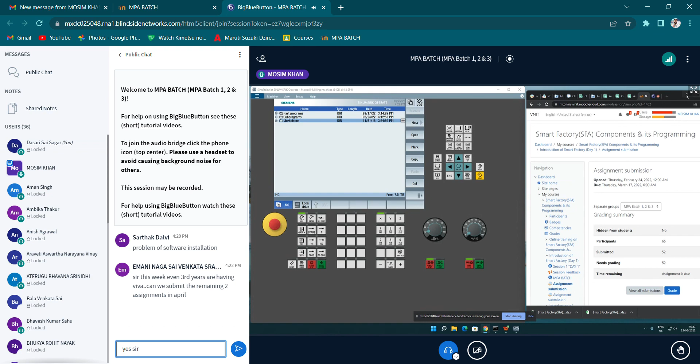So we will be starting cycles. In cycles also, the start of program and end of program will be the same. Okay. Just give one name, CNC. Just practice directly on the software, everyone. CNC05. Just create it there. Blank size, block center, width is 100, length is 100, and thickness will be -50. Absolute mode. Accept it. Write the startup program.

G71, G94, G75 Z0, G75 X0 Y0, M06. Now our first cycle will be the facing cycle. In milling, I will be telling you the important cycles. Okay. Now the first cycle is face milling. What is face milling?

If you have a raw material and you have to remove the maximum material from the top surface. So for facing, we can remove maximum material with the maximum depth of cut. So we will be selecting a face mill tool. Just go to select tool, create face tool, and give D1. M06 D1. Then start the spindle M03 at 1500, start the coolant M08, and give the position G0 G90 G54 X0 Y0

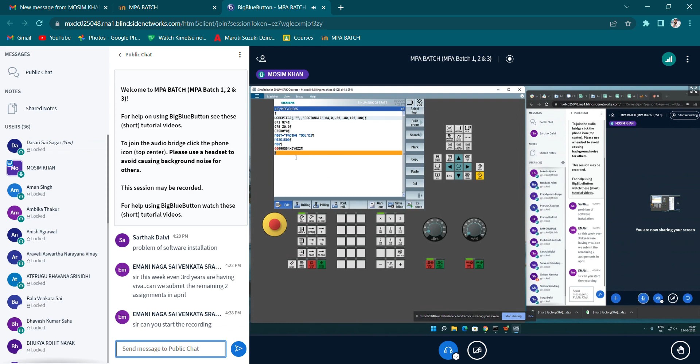Z2. I think you all clearly know this startup program and end program. It is familiar to you all now. So from here, just go to milling, just go to face milling. Now here you have to fill up all this data. Everything will be there. Just use your keypad, not your mouse. Okay.

If you go with the down key, you will see RP. First, you will see PL, meaning machining plane. Like I told you while explaining G code and M code, in a 3-axis machine we select the G17 code, XY plane. Now the second option is RP. RP means retraction plane: after machining, how much your tool will go up. We have to put that value there. Just give 5 or 10 mm. Now here is SC.

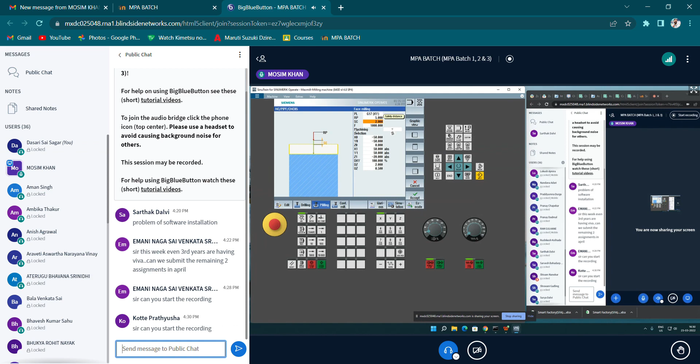SC means safety distance. Before machining, how much your tool will be up? Sir? Yeah? Sir, can you start the recording? Yeah.

So I will explain further. PL is the plane, the XY machining plane. And RP is the retraction plane: after machining, how much your tool will come up. We have to mention that point in RP. After this, there is SC, meaning safety distance. Safety distance means before machining, how many mm your tool should be above the raw material. So we have put the safety distance 2 mm from our raw material.

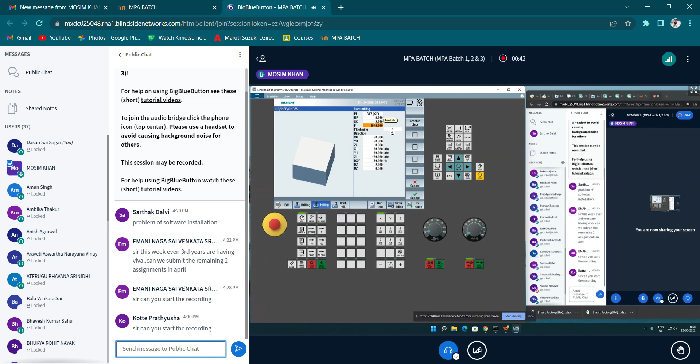Now F means the feed rate for X, Y, and Z. For all 3 axes, we have to mention the feed rate in the cycle only, not in the direct program. Now in machining, there will be roughing and finishing. On clicking machining, there will be the roughing option, and the second one is the finishing option. So first we will select the roughing cycle.

Then you will see direction. There will be different directions; you can see them in the diagram also. You can select any direction, how your tool will be moving. There are different types of directions. So just select the first option. Now here is X0, Y0, Z0, X1, Y1, Z1.

First of all, you know that the work offset is the center of your block. You have to start the machining from the corner of this part. Now your X0 Y0 is at the center of the block. You have to shift minus 50 mm. Our block size is 100 by 100. So in X0 and Y0, I have shifted minus 50 mm.

That means your tool will be here in this corner. X0 minus 50, Y0 minus 50 means your tool will be on the left side corner. Now Z0 will be 0 only, because we have to cut the material now. And X1 means how much you have to move the tool in the X direction.

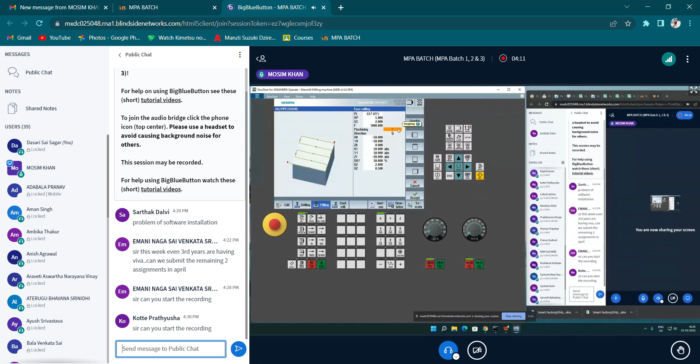UZ means finishing allowance. Here we have selected the roughing cycle first. In UZ, for the finishing operation, we have kept 0.5 material. Means we have to cut 20 mm material, but there will be extra stock of 0.5 material. So go on and select accept. Sorry. After this coordinate you have to mention the cycle.

Go on accept. After this you have to write the end of program: G00 Z10, G75 Z0, G75 X0 Y0, M05 M09 M30. Just renumber this program and start the simulation. Sorry. Okay, now start the simulation.

In simulation, you can see some error is there in N20 block: syntax cannot be implemented. N20. Okay, here is G74. It is G94. Now you can see program control override in slow motion. Here you can see only 0.5 material will be remaining.

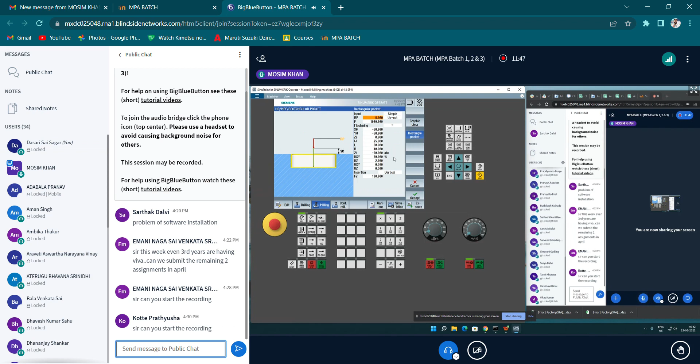And while doing a pocket or slot, use upcut. Here is the option upcut and downcut. Use the upcut. While using a downcut, there will be very high force on the raw material, so your tool will be blunt or worn. So every time use upcut. Now the parameter is feed rate 1000.

And here is the machining style: roughing and finishing. So like in facing also, there will be the same option while selecting this finishing operation. Same parameters you have to fill up, and in the last option there will be no usage.

Now you have to do a rectangular pocket. Now this is your raw material. Now the center is your work offset. We will not do it in the center. We can shift to the left side, right side, top side, anywhere. Like I have shifted minus 50 mm from this work offset, means in X minus 10 and in Y minus 10. Till here our pocket will be there. And Z0 will be 0.

Now we have to mention here the length and width of the rectangular pocket. Here you can see in the diagram. The width is 25 mm and length is 50 mm. If you want a corner radius, then you can give the corner radius. If you don't want any corner radius, directly give 0. Now here is Z1, means depth of cut. The depth we want of the rectangular pocket is minus 10 mm.

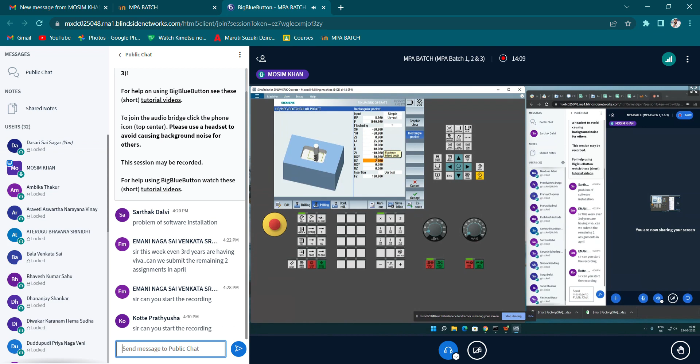DXY is how much your cutter is engaged to the raw material. DZ means how much depth of cut you want. Total depth of cut is minus 10 mm. Now how much cut per pass you want, means a single cut of 2 mm will be there. And the finishing allowance for XY and Z is there.

In the facing cycle only one was there, but in this rectangular pocket XY is also there and Z is also there, because in the facing cycle only the depth of the raw material is maintained, but in a pocket all three axes are moving in X, Y and Z direction. So we have put a finishing allowance of 0.5 in XY and in Z also.

Now in this there are pre-drilled, vertical, helical and oscillate. Every time select the vertical option while doing a rectangular pocket, circular pocket and slot. And we have to select a parameter for this insertion, how much feed rate we want. Just give a very slow feed rate there, 150, because we have to enter the raw material at very slow speed. Just go on accept, write the end of program G00 Z10, G75 Z0, G75 X0 Y0, M05, M09, M30.

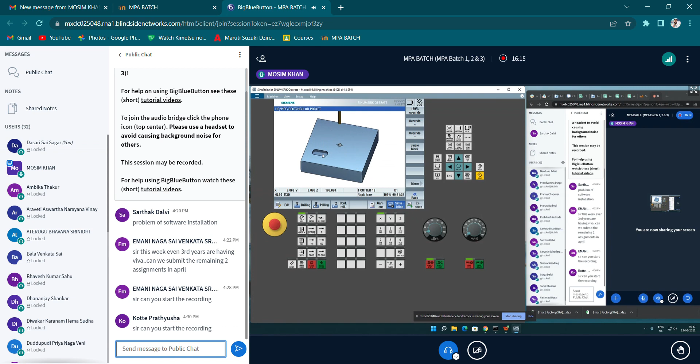Just go on edit, renumber this program, and start the simulation. I have told you we have shifted the work offset. We have not done it at the center directly on X0, Y0. When I give you an assignment, I will not give it only at the center. I will be shifting it in any other direction, anywhere. So I have given this example of how to shift the pockets directly in the cycle. Here you can see X0, Y0 if you have to shift anywhere as per the diagram.

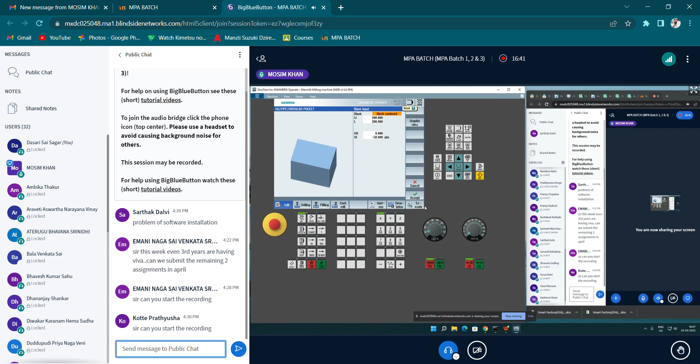Now we will see the circular pocket. In the circular pocket, same we have selected the raw material 200 by 200, minus 50 mm thickness. Same we have written the startup program G71, G94, G75 Z0, G75 X0 Y0, and we have selected the end mill of diameter 10, M03 S1500, coolant on M08, and give the position.

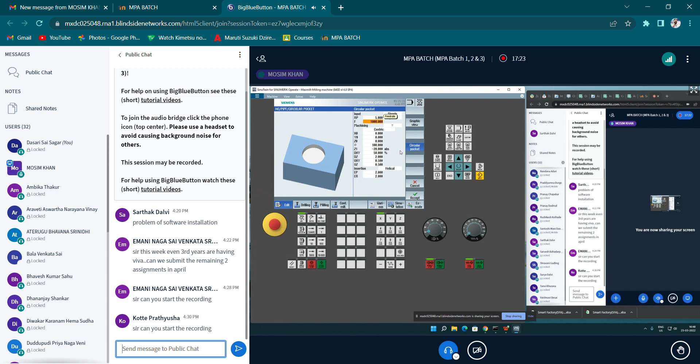In this, we have to select the option. Going to the milling option, you have to go to pocket and select circular pocket. In circular pocket, you will see the same retract plane will be there. Feed rate will be there. Here the machining option is there, roughing, finishing.

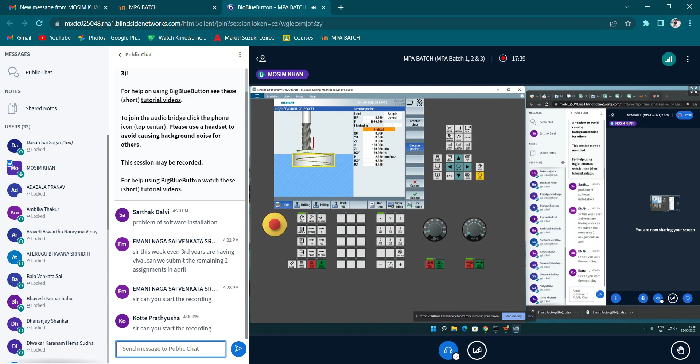The centric option is there. Here are the different options you can see: helical - you can see on the diagram how your tool is moving while selecting the helical option, while selecting the centric option, okay.

Now, same as last time, I have shifted in rectangular pocket. Now I will show in the center of your work offset. In X0, Y0 is the center of your block, work offset is there. Same we will form a circular pocket in center, X0, Y0, Z0.

Now how much diameter of pocket you want in your block, that diameter you have to mention here, like 80. Now how much depth of cut you want? Minus 20. Now how much infeed depth, means number of depth, you have to mention here, 2 mm, and the finishing allowance 0.5 for X, Y, and Z.

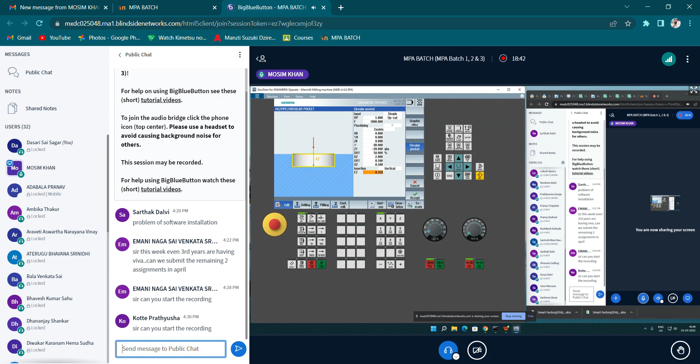Meanwhile, I have selected here vertical, go on parameter 100, FZ, and go on accept, and write the end of program: G00, Z10, G75, Z0, G75, X0, Y0, M05 spindle stop, M09, coolant stop, M30 end of program, rewind, start to rewind.

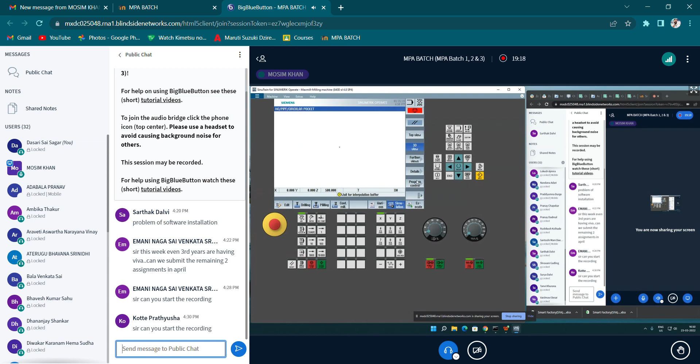Go on start and start the simulation. You will be seeing at the center of your block, your circular pocket will be there. You can see at the center of your work offset, we have created the circular pocket.

Meanwhile, if I have shifted in this direction, means X50, Y50, anywhere I have to shift in any direction, so directly in the cycle, you have to give the parameters.

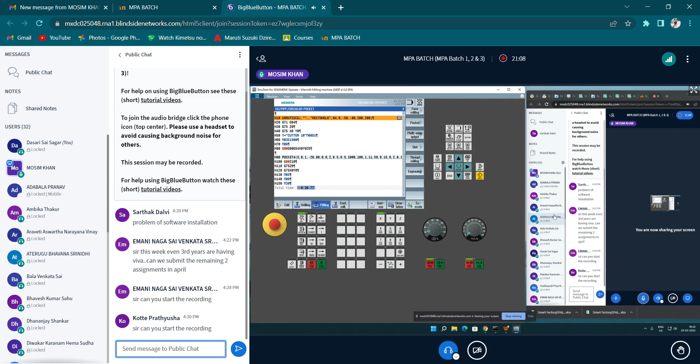Students, if any query is there, please ask. How can I take this further if you are not answering my questions? I have to take everyone's names, then I have to ask by name. Pranav, Ambika, Araveti, please reply in public chat if you are not facing any issue. Bala, Bhavesh, Dasari, Dhananjay, Diwakar, Priya, Emani, Himanshu, okay.

Now we see the spigot. If you want, this type of spigot is there. You can see this is a rectangular spigot. Same, circular spigot is there, and this is the multi-edge spigot.

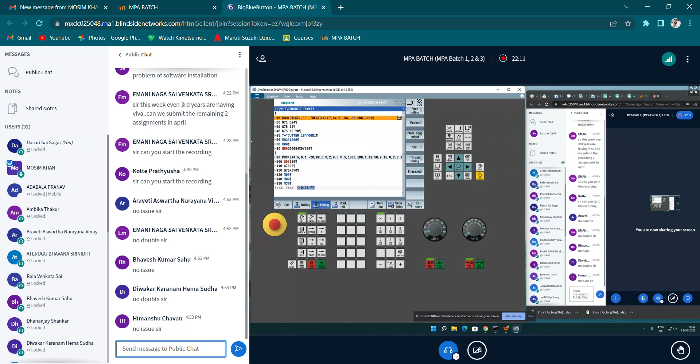Just create a block here for the spigot now, like rectangular spigot we have to do now. Just create a block of 100 by 100 and thickness is minus 50. One of you don't know how to create the various also, I have seen, so I am telling this again and again. There is normal width and length of the block, okay, and you have to only mention here HI, means thickness of the raw material, that HA will be 0.

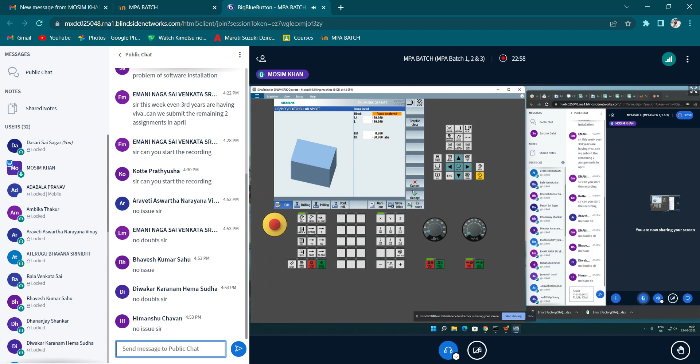Just go on accept, and in various, just see this, it should be ABS mode, absolute mode. Okay, just write the startup program G71, G94, G75, Z0, G75, X0, Y0. Select the tool. Start the tool M03 S1500. Start the coolant M08 and give the position G0, G90, G54, X0, Y0, Z5.

Now go on milling, go on multiple edge spigot. Select rectangular spigot here first, okay, and go on accept.

Same parameters you can see here also, there are somewhat differences are there. PL plane you have to select G17. Retract plane is there, 5 mm you have to select. Safety distance is there, 2 mm.

Now here two feed rates are there you can see: one is for the XY movement of feed rate and one for the Z while going to the depth. That you have to select feed rate very low, okay, you can select 50 or 100 feed rate for Z.

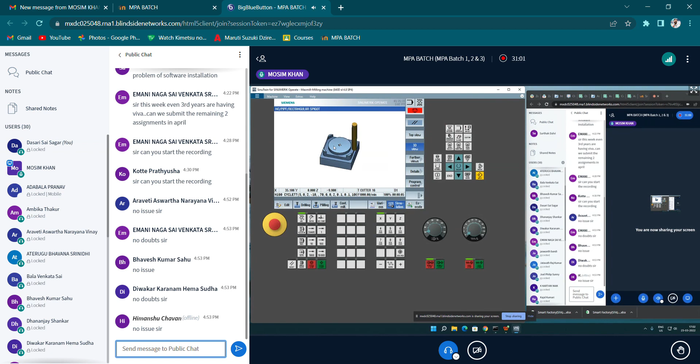You can see here there will be the rectangular spigot also and circular spigot also. I will be running the simulation. First it is the rectangular spigot. Now this is the circular spigot.

Now in milling there is a slot option. I will be selecting slot, if you want this type of slot in your raw material.

Now you have seen the rectangular pocket, rectangular spigot, circular spigot. Now if you want any type of slots, there are different types of slots, like longitudinal slot, circumference, open slot, elongated slot. There will be the same parameters used. Now we'll see any one of these.

You can see same parameters are there. PL, you have to select a plane. Mill direction, I have told you, you have to select up mill. Retract plane is there, safety distance is there, feed rate is there. Here is the reference point from where you have to start the machining. You can start with any end.

You can see from the left side, middle of your work offset. I'm just telling you, start from the middle of your work offset only while doing this slot rectangular pocket, okay, it will be easy for you for the machining.

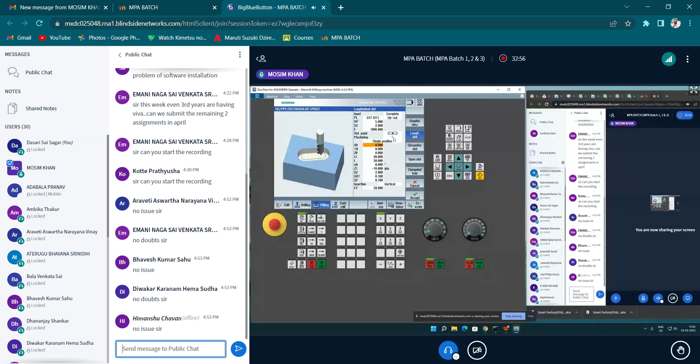X0, Y0, Z0. Now here you have to mention the width of the slot, like 20, and length is 50. Any angle you want for this slot, you can mention here. Depth of cut minus 10 mm, how much depth you want, and here is the number of depth of cuts, 2 mm. The finishing allowance is there for X, Y, and Z, and for insertion in the vertical direction give the feed rate very low. Okay, just go on accept.

Now we will see three things in one cycle only, in one program. Just see the simulation - you will be having the recording also, so you can see this program and how in one program only you have multiple cycles. While completing each cycle, you have to go on end of program. Don't do M30 here - go on M09, then go directly to new tool. You have to give a new tool, start the tool, give the coordinate, and then select another cycle. You can see three cycles in one program.

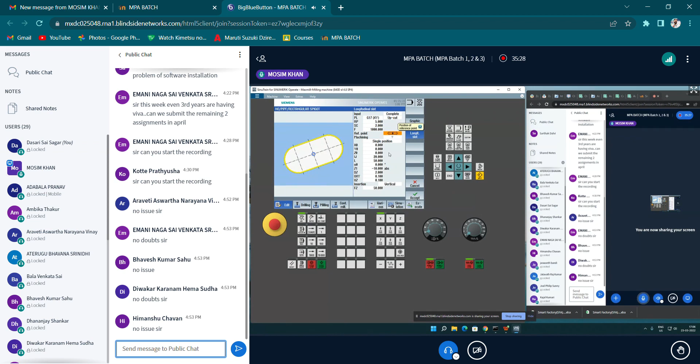What is there? G17. RP is 5, safety distance is 2, reference point, Y0. Okay here, no coordinate is given, so just give a coordinate here.

Okay, now we will see. Just renumber again. Okay, we'll see the simulation again. The same alarm is there again: no spindle direction program. We'll see the full simulation first.

See the tool. Every time, please put every cycle in every cycle - put some gap. You will be knowing then. Just give me a second.

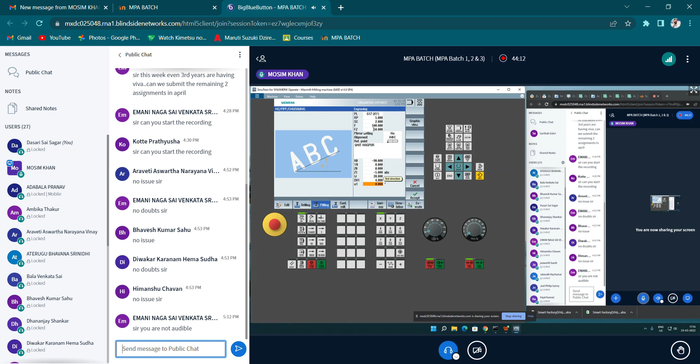Now in DX1, you can see how much space you want - the space you have to mention here. And here is the text direction, in which direction you want - you can give any degree here. Just go on accept and write the end of program.

G0, Z10, G75, X0, Y0, G75, Z0, M05, M09, M30. Just renumber this program - go on edit, renumber this program, and start the simulation.

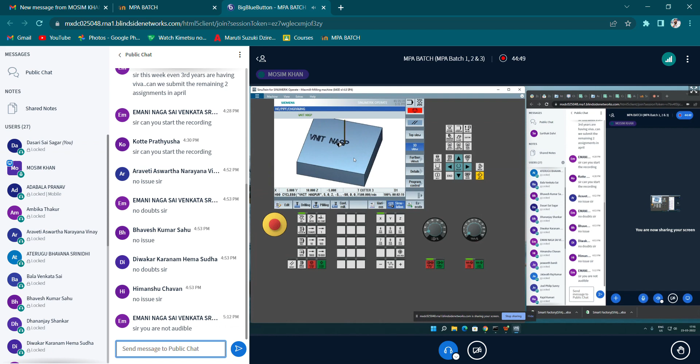You can see, from the work offset I have shifted minus 90 mm in the X direction, and Y0 means Y was only 0 - I have only shifted in the X direction. From this corner, all this alphabet is written here. Clear? Any queries there?